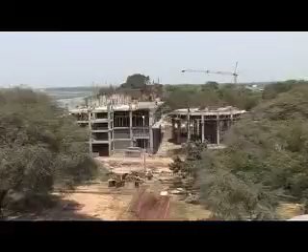In the last decade of the 20th century, Surat started to grow remarkably, and accordingly, SMC constructed new capital projects, which increased the energy bill of SMC at a faster rate. Being a visionary organization, SMC realized the importance of energy and hence took innovative steps of green power generation from sewage gas and established an energy efficiency cell dedicated exclusively to energy conservation activities.

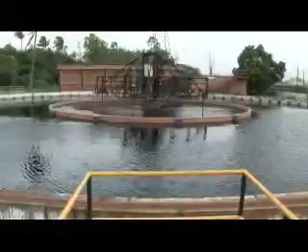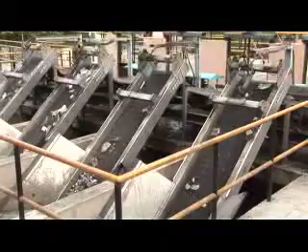Sewage treatment plants are established for treating the sewage to prevent pollution of the surface and underground water. During the treatment process, sewage passes through various stages of treatment, such as inlet chamber, screen chambers, primary and secondary clarifiers, anaerobic digester, etc. Each unit has its own function. For green power generation, a sludge digester is important.

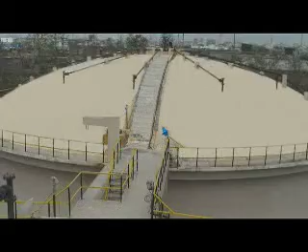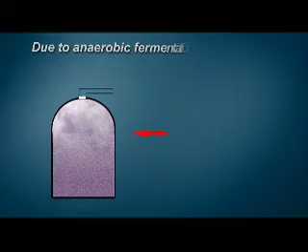The sludge digester is a closed-circuit RCC tank which reduces the volatile organic matters from the sludge by anaerobic digestion. Due to the anaerobic fermentation process, sewage gas is generated, which contains about 60 to 70% methane gas, which is used for power generation. The calorific value of sewage gas is from 4,700 kilocalories per cubic meter to 5,500 kilocalories per cubic meter. This gas was earlier burnt so that it is not harmful to the environment, and hence there was no use of this gas.

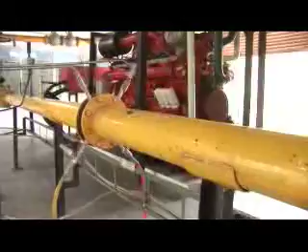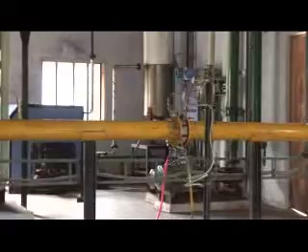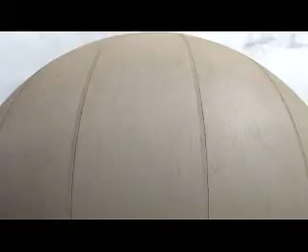SMC took the initiative in the project of utilization of sewage gas in power generation in association with MNRE way back in 1997 for Anjana STP, and afterwards a 0.5 megawatt power plant was proposed. This power plant was based on the use of an imported 100% sewage gas-based engine of Spanish origin, duly complemented with high levels of automation and a state-of-the-art polymer-based inflatable gas-holding balloon. The present generation of electricity from this plant is about 8,500 to 9,500 units per day, which is consumed to run the Anjana sewage treatment plant itself.

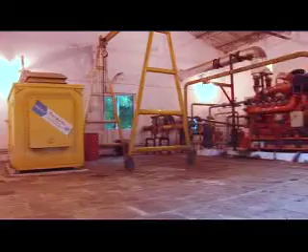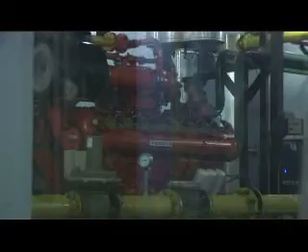Inspired by the successful operation of the Anjana biogas power plant, SMC took quick action and set up other 1 megawatt sewage gas power plants at Singanpur, Karanj and Bhatar STP. In a very short duration of 10 months, these projects were commissioned in the year 2008. Renewable energy generation data are

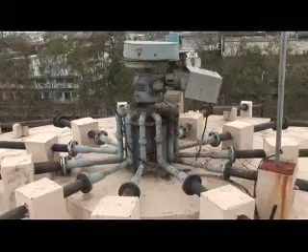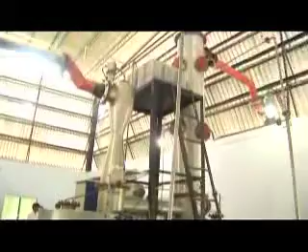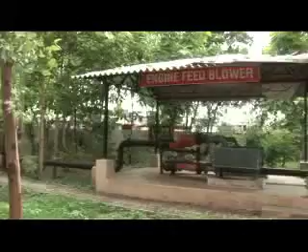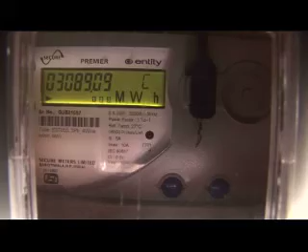Due to low gas pressure of sewage gas generated, gas extraction is done by the sewage gas collection blowers. The sewage gas is passed through an H2S scrubber to reduce the level of H2S to prevent corrosion of the gas engine. As the gas generation rate of the digester is uneven, sewage gas is stored in a foil bag membrane type biogas holder. The sewage gas is fed through the sewage gas feed blowers at specific pressure to the spark-ignited sewage gas engine, which is connected with the alternator, and electricity is generated.

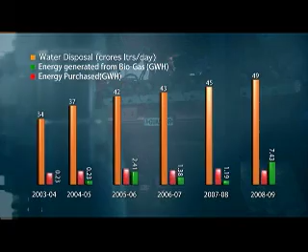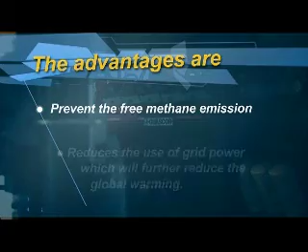As methane is a greenhouse gas which cannot be allowed to evacuate freely into the atmosphere, the excess gas is flared. Due to green energy generation, even though sewage water disposal has increased, conventional energy consumption has not increased. The advantages are, it prevents free methane emission and reduces use of grid power, which in turn reduces global warming.

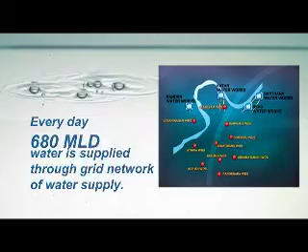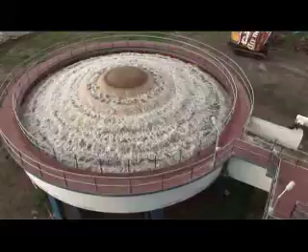Every day, 680 MLD water is supplied through the grid network of water supply. The grid network consists of the water treatment plants and water distribution stations. Raw water is collected from intake wells and filtered in the filtration plant. Filtered water is then transmitted to the water distribution stations and then fed to consumers. 20% energy of the water supply system is consumed in transmission of water supply. Hence, in 2002, an extensive study of specific energy consumption for water transmission was undertaken with the help of energy audit data. Re-engineering Route 1.

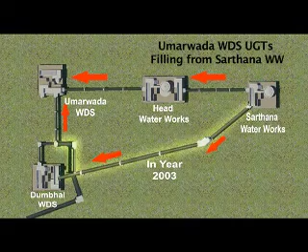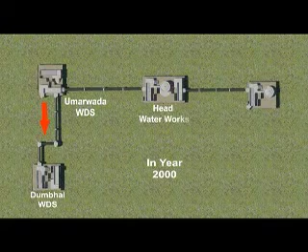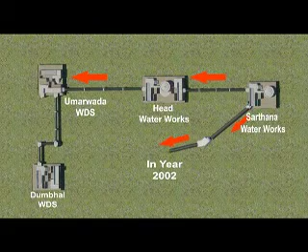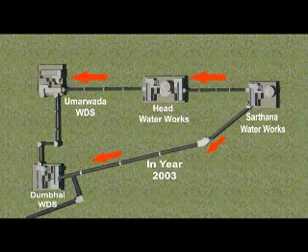Umarwada Water Distribution Station (WDS) UGT's filling from Sarthana Water Works (SWW). In the year 2000, Dumbhal WDS was receiving water from Umarwada WDS. Umarwada WDS was receiving water supply from Headwater Works, which was ultimately taking the water supply from Sarthana Water Works. In 2002, Dumbhal WDS started to take water supply from Sarthana Water Works due to a new transmission line laid. Hence, the pipeline between Umarwada WDS and Dumbhal WDS was not in use. In 2003, after due study, an innovative idea came that by making a connection between the existing pipelines, Umarwada WDS can be fed directly and double pumping can be avoided. Saving realized.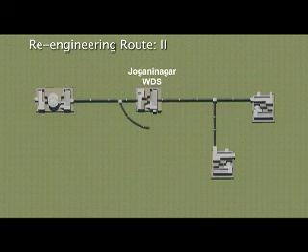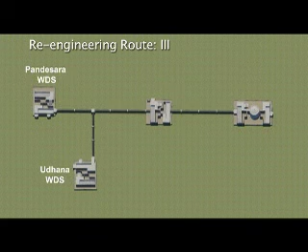In the same way, in re-engineering Route 2, Joganinagar WDS has been bypassed and Kathodara WDS and Athwa WDS are being fed directly from the Rander Water Works. Saving realized. And in re-engineering Route 3, Pandesara WDS and Udhana WDS are being partially fed directly from Katargam Water Works by bypassing Kathodara WDS. Saving realized.

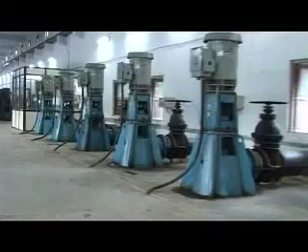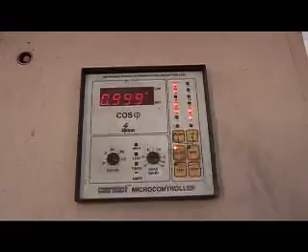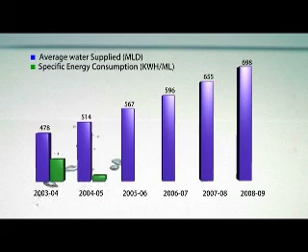Replacement of inefficient pump sets at Katargam and Sarthana Water Works has resulted in energy saving to the tune of 3.78 million kWh per annum. Also, activities like contract demand rationalization, installation of thyristor-based APFC panels, trimming and coating of pump sets, etc. have been undertaken. Due to all of these activities, even though water supply quantity increased from 478 MLD in the year 2003-2004 to 698 MLD in the year 2008-2009, specific energy consumption has been reduced from 344 kWh per ML to 292 kWh per ML.

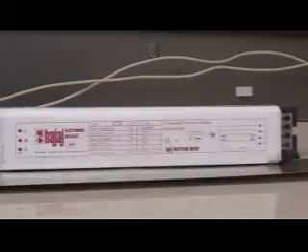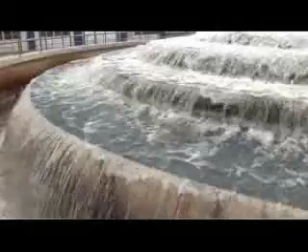SMC has also taken energy conservation steps for street lighting, like the use of electronic ballast and high lumen tubes for all fluorescent fittings, and switching off 50% of street lights on major roads during low traffic periods. This has resulted in energy saving of 42 lakh units per annum. SMC has adopted benchmarks of energy consumption for all energy-intensive sectors and has initiated means to reduce the consumption. SMC is committed to promote green power generation and energy efficiency to ensure sustainable growth and a better tomorrow.